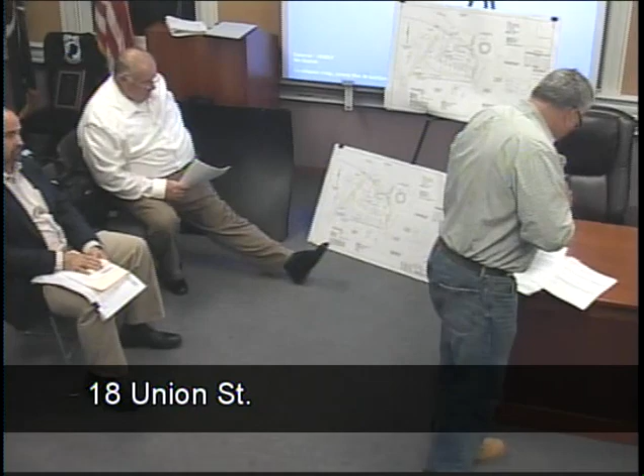For the record, my name's Thomas DePlacido with Four Oaks Corporation, and with me here tonight is Rick Goodrow from United Consultants and Jason Miller from Bowler Engineering to discuss landscape architecture. A follow-up on a couple of items for the board tonight: this was emailed over to the office today, but just a hard copy letter from Green International. This was for the internal turning radius of the ladder truck. It was discussed at the last meeting, but just so there's something in writing that verifies that. Sent us that.

Also, I don't know if the board has this or not, but we were able to get a confirmation from the building inspector on parking spaces that were required. This is an email to our architect verifying the square footage and what's required under zoning. Basically, there's 27 spaces required and 1 handicap space that he's asking for as well. So just his email confirming that. And you're providing how many? I believe there's 28, Rick, and 2 handicap.

There's one other important item I'd like to bring up: through a lot of the discussions and engineering, it came to our attention a couple of weeks ago that the adjacent property on Union Street, going down Union Street, it's very small right here, but we got a certified zoning map from the town clerk. What we thought was a residentially zoned property actually turns out to be commercial, even though there's a residential house on it. So this is up to the board, but we feel we may not need that waiver request now on certain landscape setbacks and buffers that we asked for under the site plan approval for I-4B1C. It will probably relieve us from going to the ZBA as well.

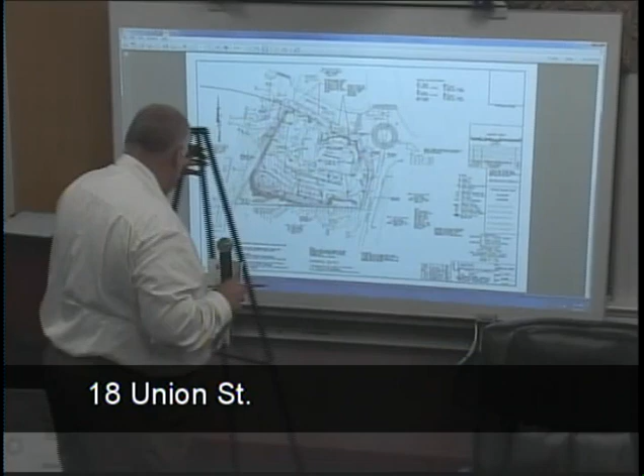Now that Betsy has the whiteboard working, I guess I can. Good job, Betsy. Yeah, all right, Betsy. She even has a zoning map up. We didn't need that either. Yeah, that's right. Didn't realize that.

Am I bold if I ask you to blow it up? Could you switch to the other? There you go. Nope, the plan you were just on, but the other page, I think there's 2 pages. Oh, yeah, yep. That one, Betsy. This one.

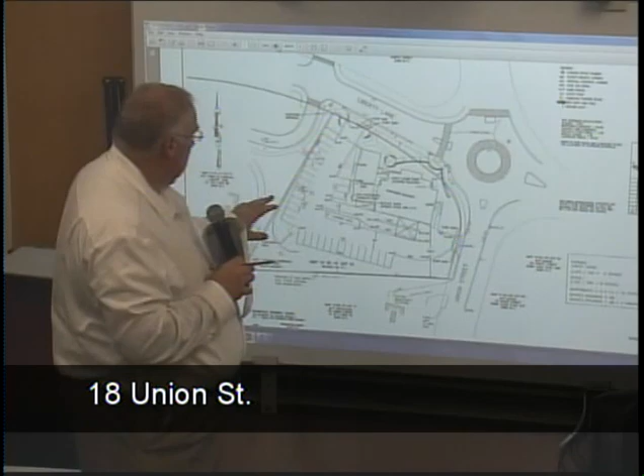So, the minor changes we've made were in this area here, where we previously had 2 handicap parking spaces in an offloading area. Those have been relocated over here. These are now 3 conventional parking spaces, and the reason for that was to utilize the offloading area to create a stairway connection to the town hall property from this site.

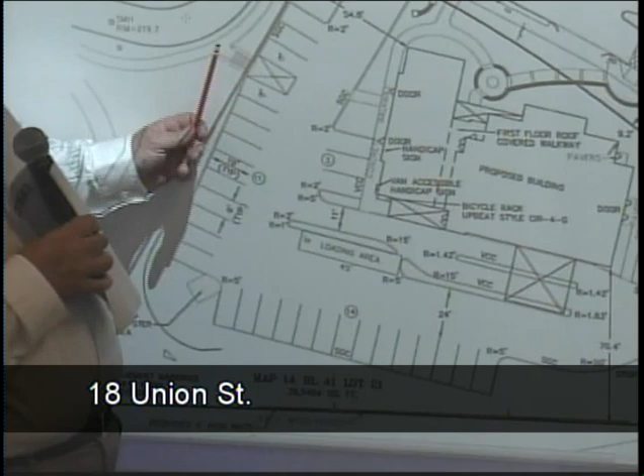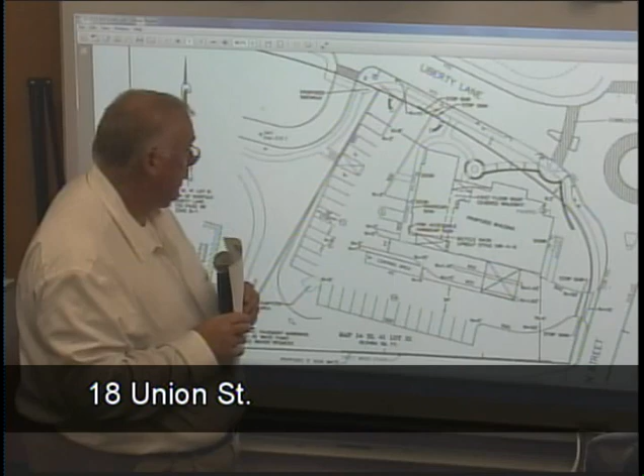Additionally, we've proposed a walkway to be constructed here, running up along the driveway for the town hall property. So those are the minor little changes that we've made. Jason's done some landscape concepts for that, and he'd like to show those to the board as well. Other than that, I think we could go through the review letter. Very good.

Phil, why don't you hit us with the major outstanding issues, and we can get Rick's response on that, okay? Okay. For the record, Phil Paradis with Beta Group. We've been asked to peer review this project. So we provided initial peer review. The applicant and the engineer have provided a response and updated plans. I think we're waiting for a couple more things, but we got a chance to look at it.

There's a few additional waivers as well as a few waivers that are being taken off because of the changes. The most notable is that the design has been changed to include an infiltration system to retain the stormwater on site, which will now meet the requirement of the bylaws. And he's also done a brief report on the impacts associated, so the W3 is not required anymore.

There are 3 new waiver requirements that they're asking for. Because the infiltration systems have to be fairly large, they are asking for a waiver to allow them to be located within 10 feet of the building slab and 10 feet of the property line, where 25 is required. They're also asking for a waiver for white paint as opposed to reflectorized paint for parking spaces. And then they're asking for a waiver for the face of a wall to be greater than 4 feet.

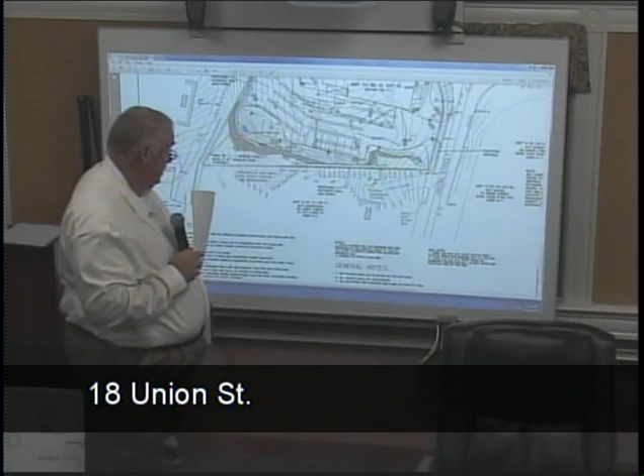Rick, what is the separation on those underground infiltration units? Can you change to the next plan, Betsy? I know we've allowed them on private property to be closer to the lot line on a number of occasions. Just want to see what the... This sheet on the other set, please. 8 sheet set from the first. There it is. Nope, that's not it. I'm sorry. So as Betsy's pulling it up, I can certainly show you where they are, but the structures are located below the elevation of the slab, the first floor, so they're underground below that.

And what's the separation from the high water mark on those units? More than 4 feet. It's more than 4 feet? Yeah. Okay. In that case, you don't have to bother. We had a couple, like over at Boyd's Crossing, they required some additional testing, because in these infiltration units, if there's a 2-foot separation or less, then they don't work. So as long as they've got that minimum separation, keeping it on his own property, not 20 feet inland, I don't think is a big concern, because they're gonna function properly. And they're gonna have their own responsibility to clean these things out, too.

Yeah, one of the other waivers we requested was for some hydrodynamic separators that are proposed, and a comment was made by Beta with respect to who would be responsible for that. Obviously, the property owner would be responsible, not the town. You would be. Right. I saw that, thanks. All right, thank you. All right, Phil, back to you.

So, yes, and then SP 19, we would expect a final wall design. That can be included as a condition, probably. Do you have the wall design already? Some of the design review board comments were that we use a Redi-Rock that looks like a larger block, but looks like natural stone when it's constructed. We do have that. I think what the consultant's talking about is a structural engineering design. When it's approved and we know we're all set with the walls, we would send that out to bid to a couple of different firms. Well, that's part of your building permit application anyway, to make sure those are structural. Correct. Yep, and we would supply that.

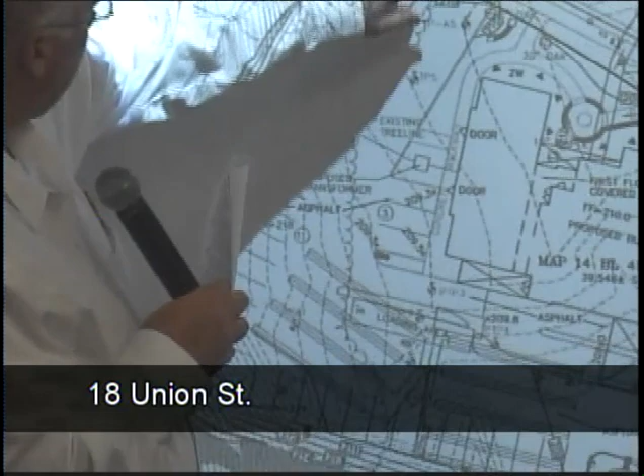The G1 on page 6, I think there's a confusion about the line of the sidewalk. The existing plans show a brick walkway crossing the town hall parking drive, and it looks like the walkway goes behind it. If I may, Betsy, could you change that over? So the issue with that is there's a transformer located here and a handhole located here. The handhole is flush. The handhole is flush, yeah. But we don't want to put the sidewalk through the handhole or around the handhole. So that's why we were proposing to relocate it to the back side of the handhole. It's very difficult to get a handhole relocated.

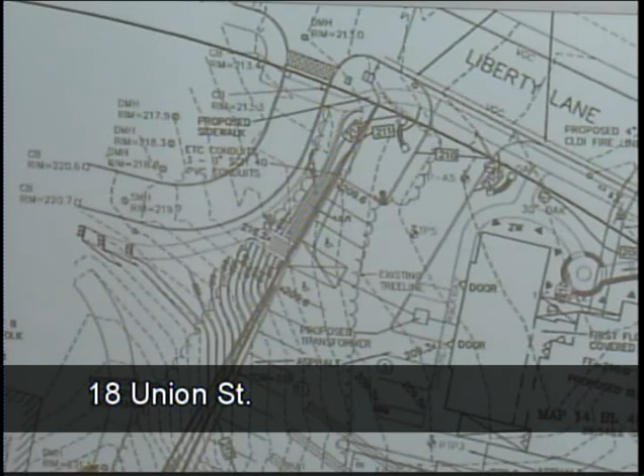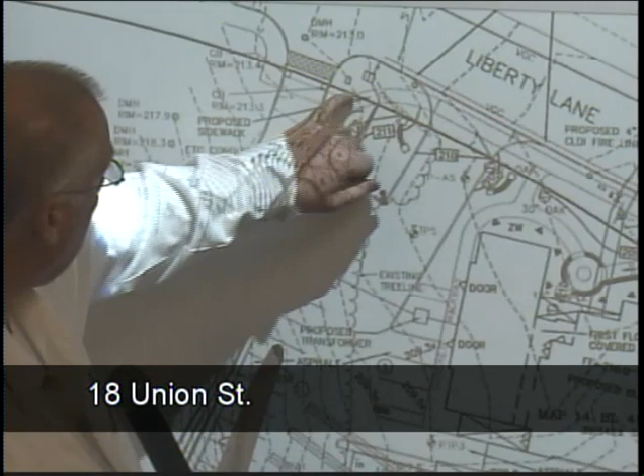So there's a brick crosswalk here existing? Existing at the town hall property. Then there's two catch basins here. So what we're proposing is to relocate the crosswalk due to this electrical infrastructure, the transformer and the handhole. So would you move the brick to the new crosswalk location? We would relocate the brick. If the handhole's flush and the utility company would allow us to put a flush sidewalk up against it, then we could go over it. But if not, then we would remove what's there and relocate it back a little bit. It's a good comment from Bader.

I really think it's going to be a field issue when we get an approval and get with the electric company, and then we could certainly update the board. You're probably not gonna be allowed to go over it, so you probably have to relocate that walk. Yeah, I think what's confusing about the plan is even if it's a field condition, it should be noted that the brick should go wherever the sidewalk is, because right now it's kind of like two separate entities. Do you have a note of that on your plan, Rick? Sure. Okay.

So, G3, obviously a lot of work has gone into the plan set, as if this particular entrance design is chosen. If we're combining it with the town hall, then I think there's going to be iteration of some changes, some engineering that has to be developed there.

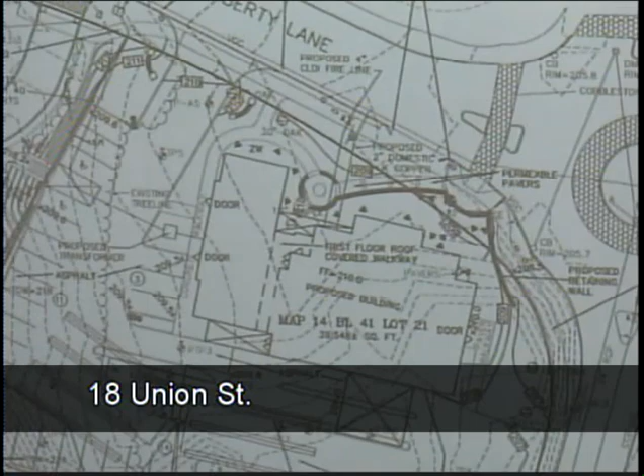Rick, can you just point to where the right-of-way line would be on the drawing? Sure, this line here represents the right-of-way. That's what I thought. Okay. This is the sidewalk that's being proposed, this is the sidewalk that exists currently. So we're picking up at this point, running the sidewalk down, and then this is the decorative wall here. And then there's a seating area built in behind it, which you'll see on the landscape plan that Jason can show you.

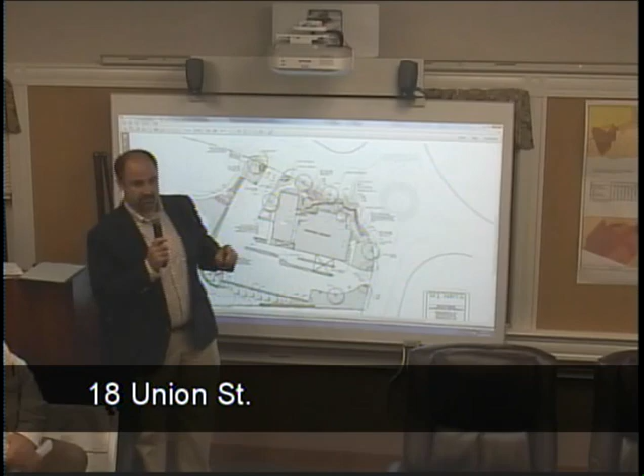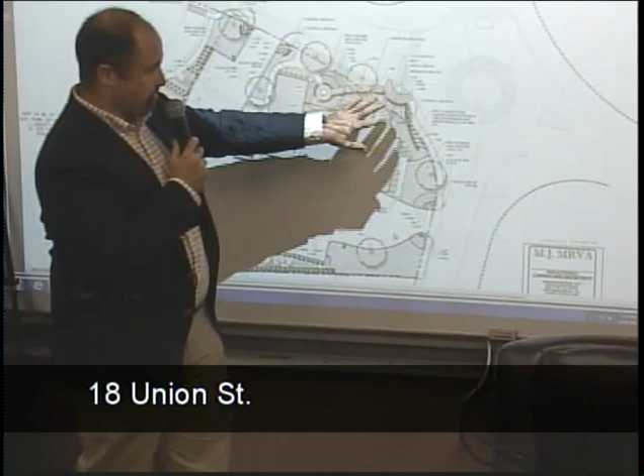So when we were looking at this area, we saw this as the bookend for the streetscape that comes down Liberty Lane. And it also helps connect across the street to the common area. And so the materials of the walls and of the paving themselves mimic what was happening across the street. So it ties the whole streetscape together. So you create this nice urban design feature for pedestrian circulation as you move through here.

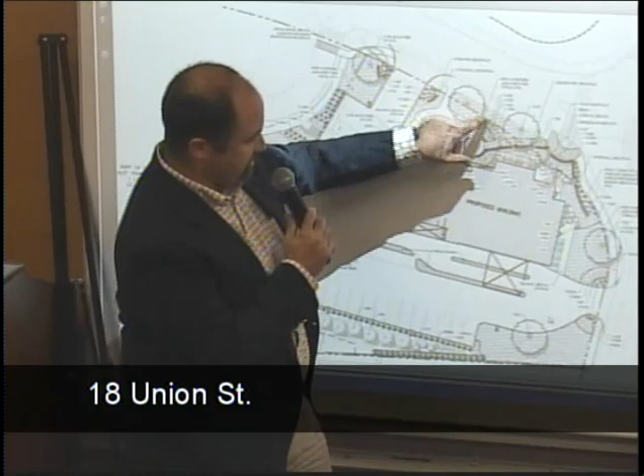And then this is where the right-of-way line is here, so you can see that this is where the paved area is with the walls. By situating it this way, you have a nice landscape transition from the back of these walls up to the proposed building. Where's this actual sidewalk going to be? So this sidewalk's going to be right here.

So is it going to continue on? Yeah, continue that way. So it goes through the seating area, John. Okay, that's what I was asking. Yeah. Very similar to what it does existing across. This plaza is a little bit bigger than this one is here, but I think that one has the more importance from the town perspective. Okay.

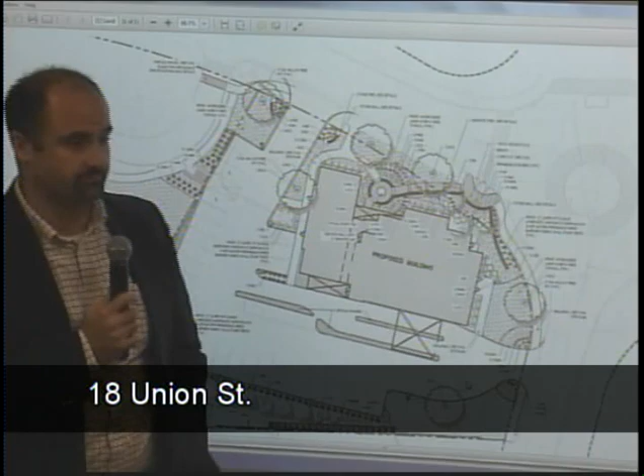Anything else? Yeah? I think part of it's going to be within the town right-of-way. Right. So I think the ownership and maintenance of it is going to be maybe a condition or something. Okay. Did you get that, Gino? Yes.

Then there are probably some housekeeping things related to stormwater management that are not too big. We would, however, call your attention to SW1H. The infiltration rate used in the model is reflective of a high A soil. The NRCS soils map indicates that the soils are, I think, a Canton loamy sand or fine loamy sand, I forget exactly, which are rated as a B.

So we would request that the applicant provide some infiltration tests to confirm that they're using a higher rate for this area. I don't discount that they're likely to get that, but I think it's a policy that we should. Have you done any testing out in that area? We've done soil testing for the septic system.

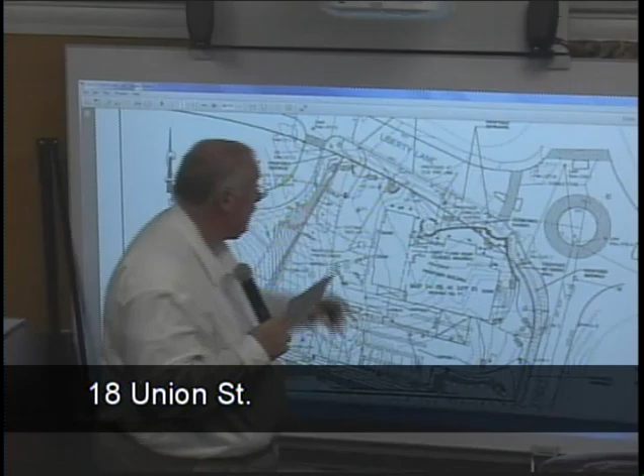Now, the NRCS mapping is classifying this as a Canton soil, which is a hydrologic soil group B, which would not give you a medium sand, typically. But the field conditions, the 4 test pits that we excavated, indicated medium sands. Where were your test pits? There's a test pit here, here, here, and I believe over here, right here. I believe those are the 4 that we dug. And then we also looked at, it's got to be half a dozen test pits that were done by Coler and Colantonio, and those soil logs were also provided.

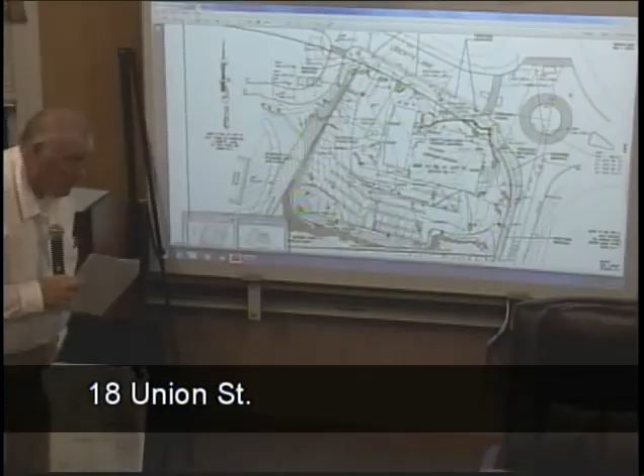So your data is differing than the, what was it, geological data? I don't know where that other source was. Soil Conservation Survey by Norfolk County. Do they differ? Yours is more favorable. Well, the county just maps them based on geology. He's saying that he actually tested it. Now, when you tested all around the site, did all of the soils come out the same? Yes. So the whole site, no matter whether you're the back or the front, all of them come out the same? They were all sands. I believe they were fine sands to medium sands, but they were all sands.

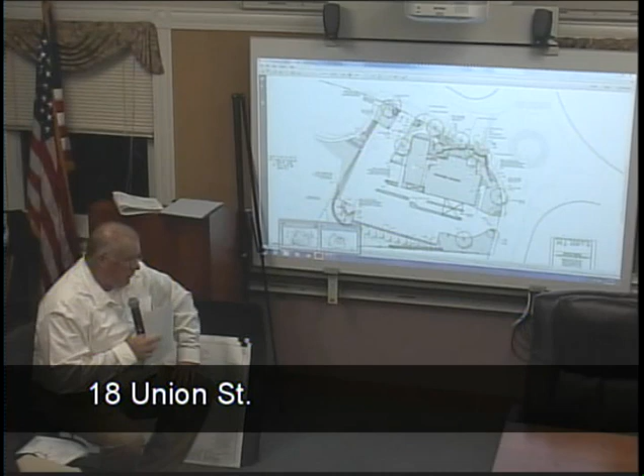Rick, where are the infiltration points relative to the places you tested? There's actually one located over here and one located over here. So, okay, so they're a few feet away from where you tested. But there are soil logs that we had from the other firm that were in those areas, that indicated that it was the same type of soil that you were seeing when you dug your pits, right? Yes, correct. And actually, when this went through permitting previously, Coler and Colantonio did the engineering design at that time, and their drainage design was based on the same Rawls rate that we use, 8.27 inches per hour.

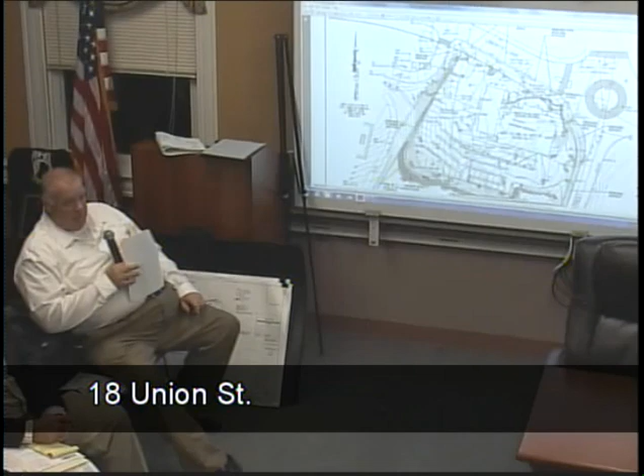So do you feel that the number and location of testing sites satisfies best engineering practices from what you're advising? So I think it's DEP's policy to require that you use the Rawls rates for the NRCS soils, unless, if you want to use something different, you provide on-site testing.

So I guess the question is, that requires- But didn't he do that? Didn't he provide on-site testing? That was my question. He did perc tests, which are tests for the septic, but not... But the question at hand is the type of soil, correct? I don't disagree that he's gonna get a high infiltration rate. I think it should be a practice that whenever it deviates, you provide those tests, you know.

I think he may actually get a higher rate than the 8.27. I agree. I mean, based on what we've seen, I'd expect these soils to be in the 40 or 50 inch per hour range as opposed to the 8.27 we're using. You don't know till you test it. What's the downside of testing? Just more cost, obviously. Otherwise, yeah, we'd have to go out and test. Or time? Time and cost.

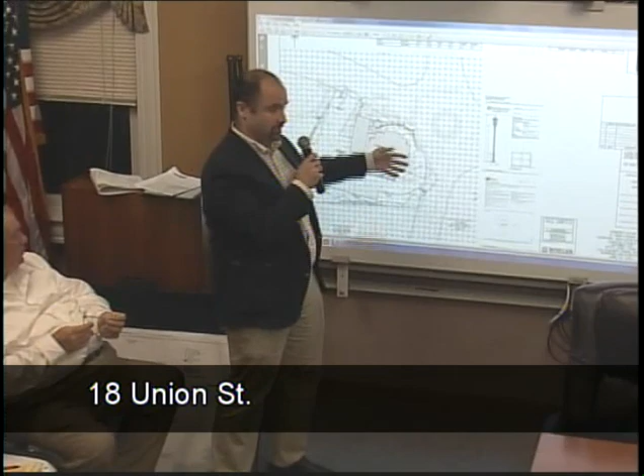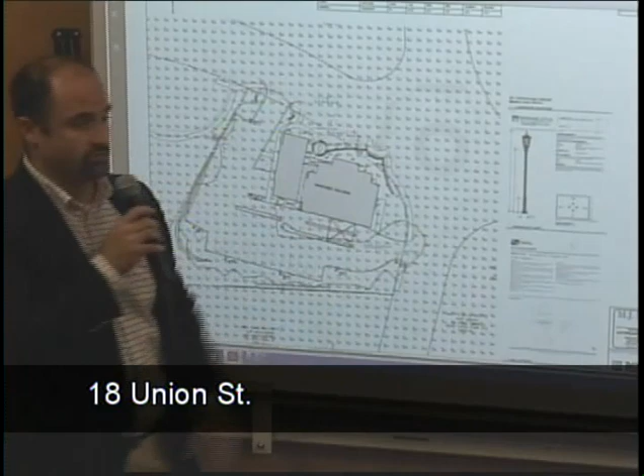Okay. So you've just made some modifications to that based on their comments? Yeah. And so if that's the case, I think the lighting plan also, if it's been changed, should go back to design review to follow through on their initial comments. Right. So this shows you the locations of the overhead lights in the parking lot itself. And then in the front there are uplights that would be either in the trees themselves or cast up on the building. This is the light pole we'd be using in the parking lot, which is the same light fixture you see along the street. So it ties in the lighting elements from Liberty Lane into the site itself.

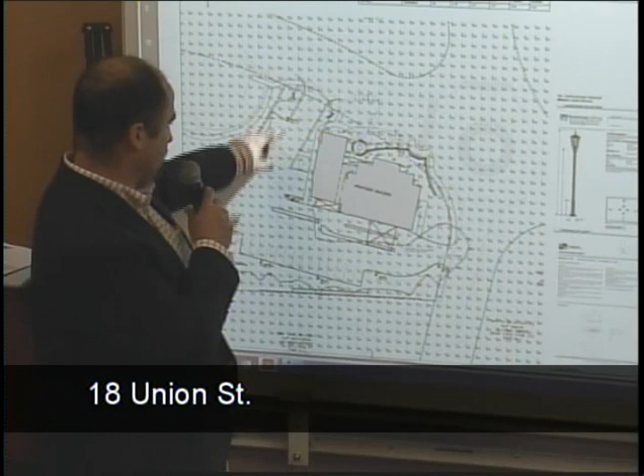So what were the modifications design review had you adjust? Some of it was locations of light poles, to try to get more light in this area, because originally we had this light pole a little closer to the wall, and then we moved it here to add more light to the parking. Betsy, do you have a copy of the design review's report to us on the lighting and the landscaping, their initial plan? Sure. All right, so as long as we have that for the file, we have a record. If nobody has objections, we could have this plan and the landscape plan sent over to design review to follow up on their initial comments, to make sure they followed through as they were supposed to.

Sure. Were any changes made to the lighting to accommodate this pedestrian walkway change that you guys put in? There was no lighting for this right here. Is there any additional lighting? There was no additional lighting made for that. We could leave it up to the design review board to make their assessments and re-review, especially where they've done the first report. Now they're getting their second report back with their comments. I think it would be out of place to look at it ourselves first, so they should give us a report back and make sure it conforms.

We also made changes to the design review's landscape plan. Do you remember that? Did we make some changes to their comments also? There was an island or something, planted in the middle, and I think we pulled it up to the edge or something like that. All right.

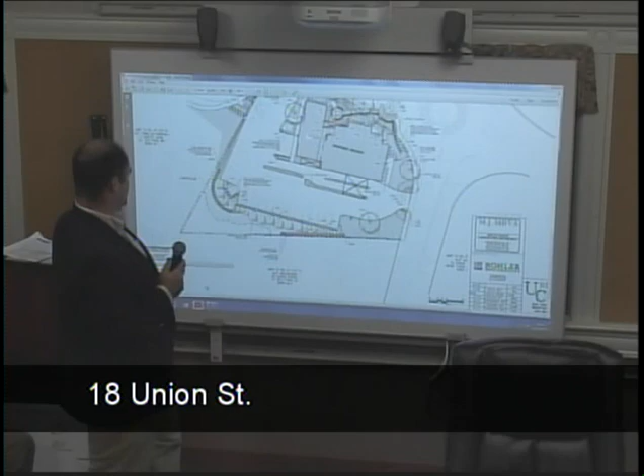Mr. Chairman, I think it might be worthwhile if Jason from Bohler just highlights some of the revisions based on comments from this board and the design review board, because we're pretty excited about this new landscape plan. We reduced the height of walls, and I think the whole pedestrian pathway is very friendly. Sure, go ahead. One or two, Jason? One. Yeah, it's perfect.

Before we go here, I'm so sorry. Where are we at with this alternate entrance location? I'm sorry if I missed that last time. What's the status of whether we're going one way or the other? Isn't that on the warrant for the fall town meeting? Yes, it is. Why is it a warrant issue? Why is it not coming up here for us to recommend? Well, if they use the alternative entrance, it has to be approved by town meeting. That's the law.

What I had talked about is, when we close this out, I would like to vote on approving both entrances and give a recommendation on which one we'd prefer. So if they get it voted at town meeting and we prefer the combo entrance, then that's the one they should be required to use. If they don't get town meeting approval, then we could approve the other one. And it is on the warrant. So the reason I ask is because it greatly influences your landscape plan, right? How you treat that corner and the entrance is largely driven by where the entrance is. So that's why I interrupted.

I think if we approve this plan and recommend the alternative entrance, we should probably have a stipulation that they come back with an adjusted landscape plan. We can actually go over that tonight, if you'd like. We have an updated landscape plan for both options. Perfect. I was almost wondering, shouldn't we develop the one that you recommend, emphasize that, and then have this as a backup if it doesn't pass? Yeah, we'll need both because the town meeting could reject the proposal. I know.

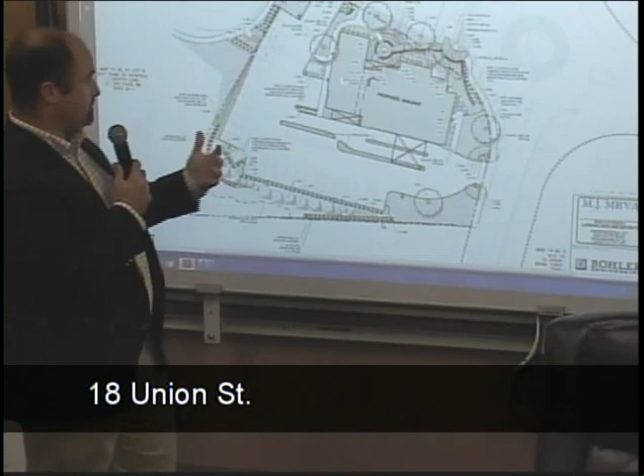Absolutely. So why don't we start here, and I'll run through a couple of landscape changes. I'll summarize from the DRB and where we are now, mainly in the rear. And then we'll talk about the alternate layout after that. Great. So let's start in the rear. Originally with our wall design, when we went to DRB, they commented on how to soften up the wall from the view from Liberty Lane.

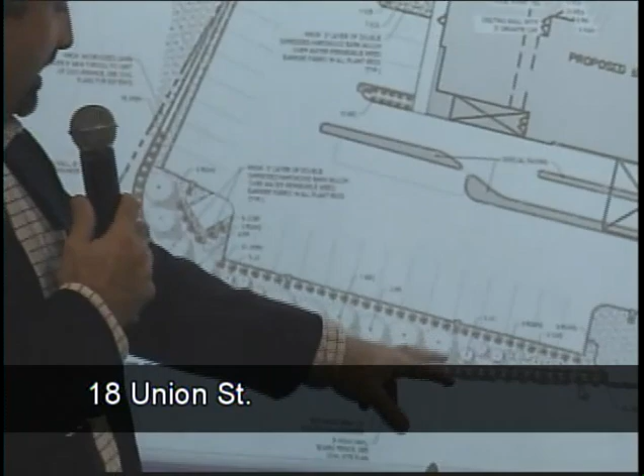So we went back and looked at the wall design and how we could break them up and then add this evergreen planting screen that's along this bottom level. So when you're looking down Liberty Lane, you'll actually see these evergreens themselves that help soften this wall along both of the retaining walls here.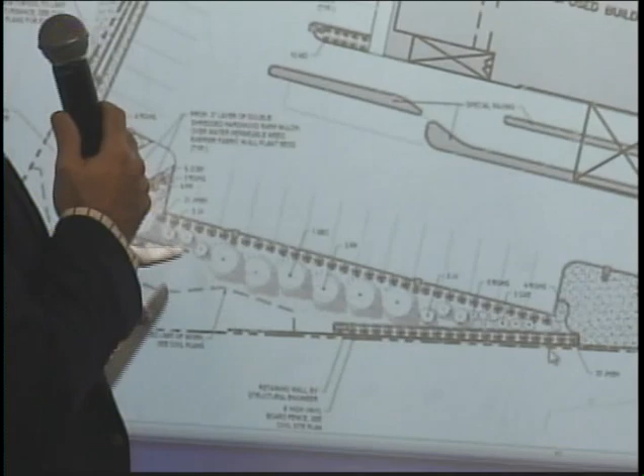And then on the retaining wall that's on the lower property line here, we actually planted evergreens behind that with the same concept for the other retaining walls, doing the same thing along this edge, which would just be junipers. It's a low maintenance plant and it will help soften up the walls in that area. So those were the rear changes for the landscape, which really helped soften the wall in this area.

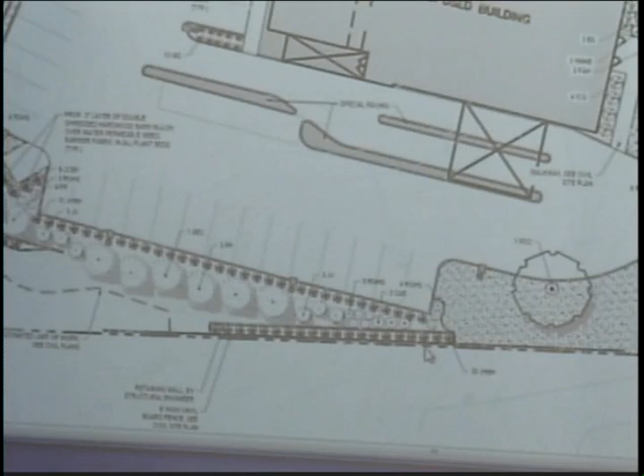Is it a two-tiered retaining wall? Yeah. Here. This is where you have the one wall here, then you actually have the fence along here. Originally it was a two-tiered wall, but it's no longer a two-tiered. Just to clarify, it's just one wall with the fence, and then this is where we're able to do some evergreen planting, junipers. If it's gone back to a one-wall design, how high is the wall?

It's in this plan that he handed us, I don't know. Betsy, can you go to sheet 4 of the site plan? The original site plan, right?

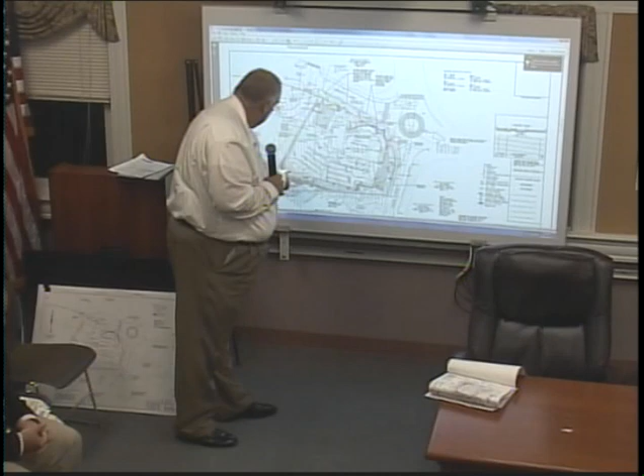What we've done in front of the wall, from the parking lot leading up to the wall, is we've done some grading to soften the height of that wall at a 1-to-1 site grading, fairly steep. And we provided a planting area in front of that, as Jason had mentioned. So you're gonna see the evergreen shrubs. So right in here, behind the dumpster pad location, we were able to do some grading in front of the wall and soften that to about 8 or 10 feet.

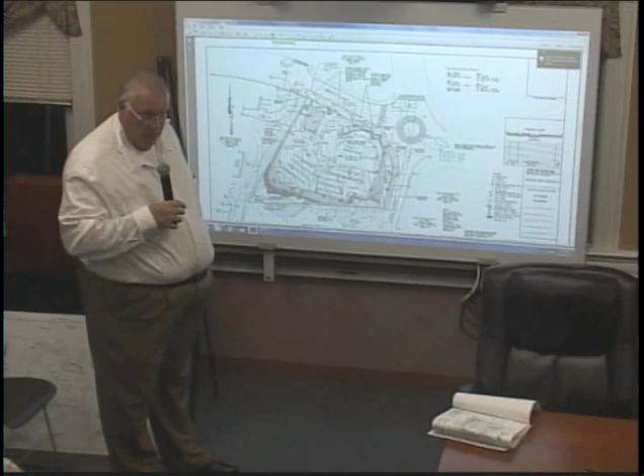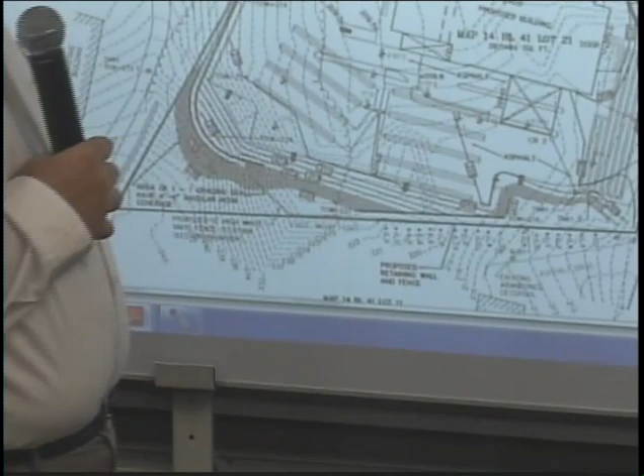So now you're gonna have the evergreen planting that Jason's showing up here, that's gonna be blocking a portion of the wall. And then this smaller evergreen planting up top that kind of blocks the fence that's on top of the wall for safety reasons. And the wall itself is how high? 8 or 10 feet? 8 to 10 feet. It might actually get up to 12 in a couple areas. I mean, it varies. Okay.

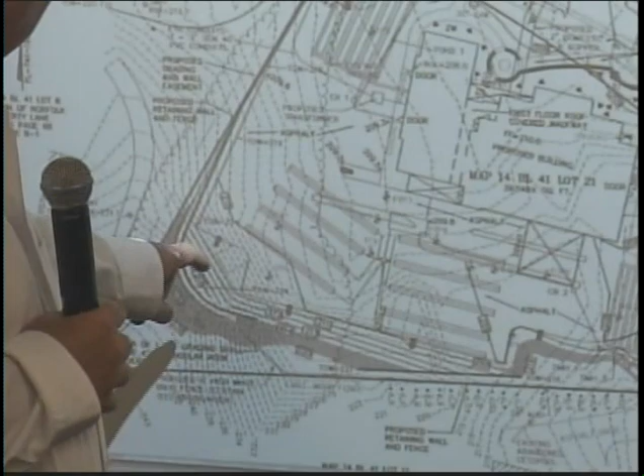8 to 10 above, so you're sloping up. A sloped planting area, and you're 8 to 10 feet above the top of that slope or above the parking lot? The sloping's probably 6 feet from the back of the dumpster pad location to the bottom of the wall, and then it's 8 feet from that point. Okay. So 14 feet above. And that slope on the planted area, what is the grade? 1 to 1 is what we were looking at.

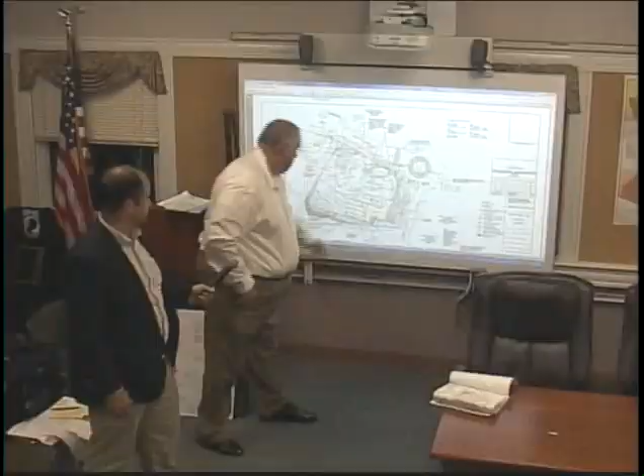And this is the wall that's faced with the stone that Tom was talking about? Just to minimize the wall. Makes sense. 1 to 1, okay. Yeah, in combination, rather than flat. Now, how about down the remaining wall out to Union Street? This wall here, yeah, that's much lower. You're gonna ask me, now I gotta read it, because I can't read it on there. So the highest part of the wall is around that corner? Yeah, we did a lot of grading revisions and softened it all with landscaping as we went through it.

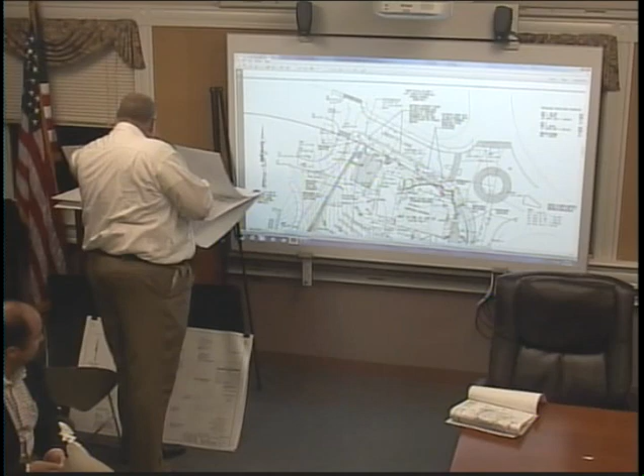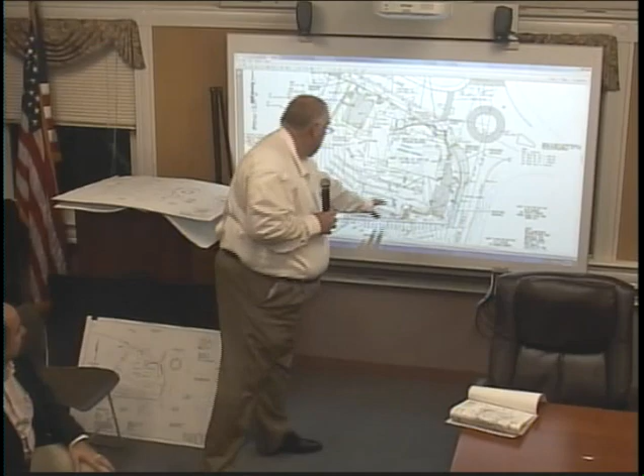So that wall, I mean, it varies. You've got some steep grading in this area here tying in, but that's like 6 to 7 feet or so in height in this area here where it's at its highest. The grade's dropping off, the wall's following it, and our grade's coming down along with it. Is the parking lot itself sloped up towards the wall? No, this parking lot's relatively flat with some undulations to direct the stormwater flows. So those evergreens also follow along that sloped planted area? Yeah, we wanted to screen the walls, is really what the intent was.

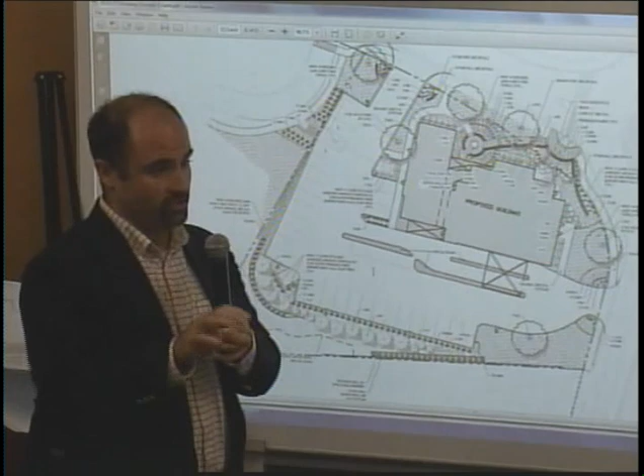So this is that area we were just talking about. If you can envision it, if this wall is 8 feet tall, these evergreens are 6 to 8 feet tall. So it's really just seeing the tops of that. But what helps visually too is that you have evergreens on the top of that wall too. So you'll see the top of the evergreens, a little bit of the wall, and then evergreens above that as well.

Then the fence behind it. So, and then the plan indicates that you're gonna have stone slope behind that. Right. And that's what these evergreens help screen, is that stone riprap slope that goes up. So where we're able to plant is where the grades are a little bit further apart. They're not at the one-to-one slope.

What's behind your evergreen? Is it a deciduous? Where you have the larger diameter? These ones? Yeah. These are the bigger evergreens, so they're like spruce trees. Oh, so they're also evergreens. Right. And the nice thing about the spruce trees, instead of just going straight up, they'll get wider too and really fill that in to screen.

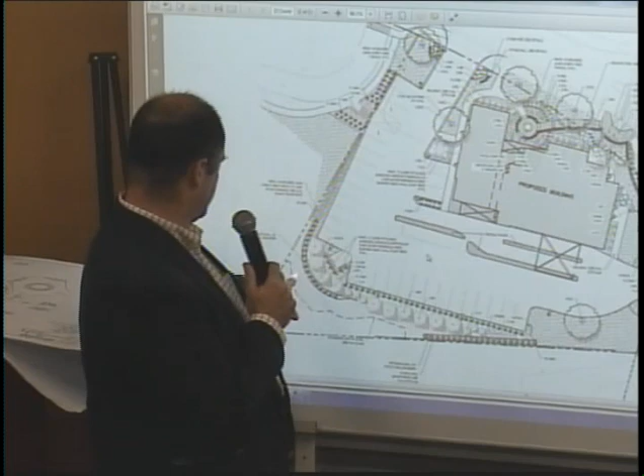What variety is the smaller evergreen that you have along the line? These ones are cedars. No, the entire line. This one here? Nope. That marches all along the parking lot? Yeah, what's that? Those are grasses. They're going to be out in front. Oh, okay, those are low. Yep.

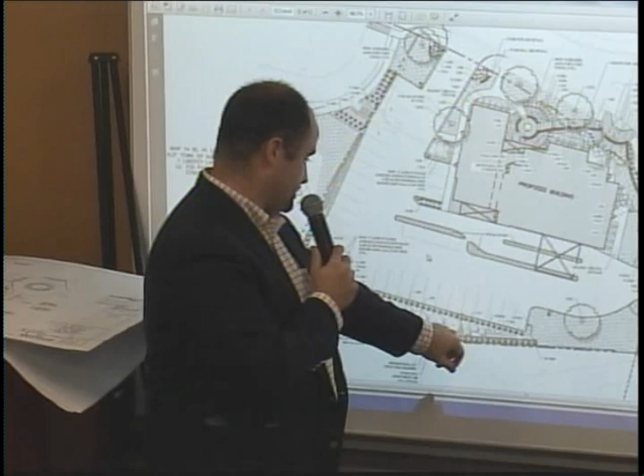And the wall that's right up against the property line, is that really the fence, or is that the wall too? So this is the fence line here, right up against the property line. Then you have a row of juniper trees. And then in front of that is where you have the retaining wall. So there's a separation from the property line. Fair enough. Okay, so if you're in the parking lot, you're looking at two walls in that section, is that correct? Here, you're looking at one wall, because the wall is here.

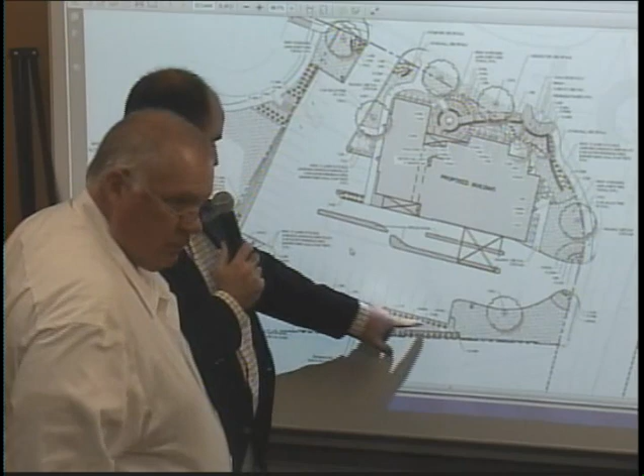I'm missing it. That long row with grasses, is that what you said? That's out in front, not a wall at all? Nope, those are plantings. You're at parking lot grade there. All right, I understand. Thank you. So when you look directly up that driveway, you're gonna see the top of the stone slope is at 239. The parking lot grade is at 210, so you got like 29 feet.

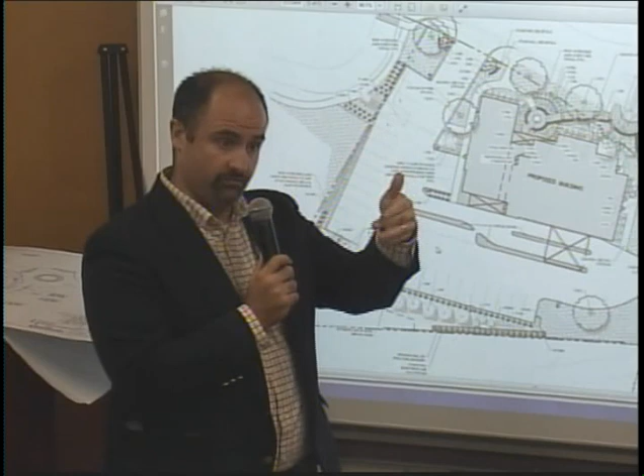And you're gonna break up with the evergreens, is that it? Two levels? Right. So you have the big evergreens that are here, then you're gonna have the wall, then you're gonna have evergreens behind the wall, and then behind that evergreen is the fence. How high is the fence? 6 feet.

So I like it all except that in the forefront is a dumpster. That kind of bothers me. And I'd really love to see if there's an opportunity, I mean, that corner's sort of becoming a focal point in a nice way, a soft way. But I almost wonder if you could put it on the opposite side. You'd have to relook at parking and all that other stuff. The dumpster would be fenced, correct? Yeah, but I'm thinking of sight lines, your eyes carrying up to it and being brought up by a dumpster enclosure. It's just not doing it for me.

I think they got it there because it's the deepest part of the lot. Yeah, I didn't know if you could get it on the exactly opposite symmetrical corner. You see what I'm saying? What do you think? I don't know. Worth exploring. Because then, you're coming in off the street, it is this sort of anchor in the background. You're really doing all this nice stuff to soften it, and it just feels like a lost opportunity.

Yeah, I understand you. I think one of the tough things is getting the access to there, and it's the parking. Yeah, I don't know if it's possible or not. It may be worth just exploring to see if it's possible. May not be. Could you take a look at the alternative plan now? Yes, can we touch on this? This is the other area I wanted to talk about with the landscape before we do that.

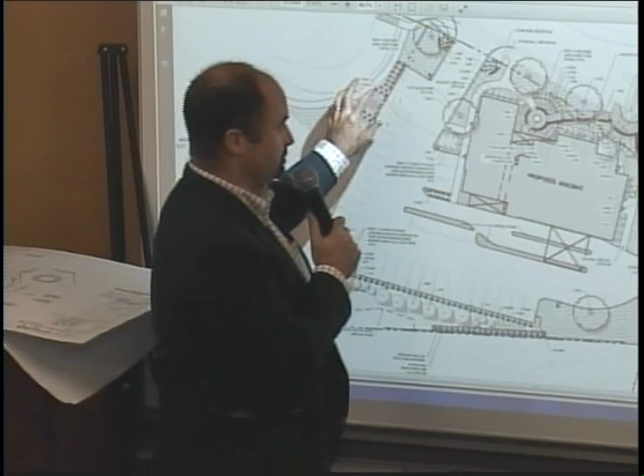Right, so we have that nice new walkway with the stair connection. The materials of the stairs also talk to the materials we're using here, but also the materials at the plaza, with the stone walls and then the nice staircase going up. And in this area, we're planting around the stairs with juniper, and we're also adding daylilies along the edge of the wall, so we have some nice seasonal color as people move.

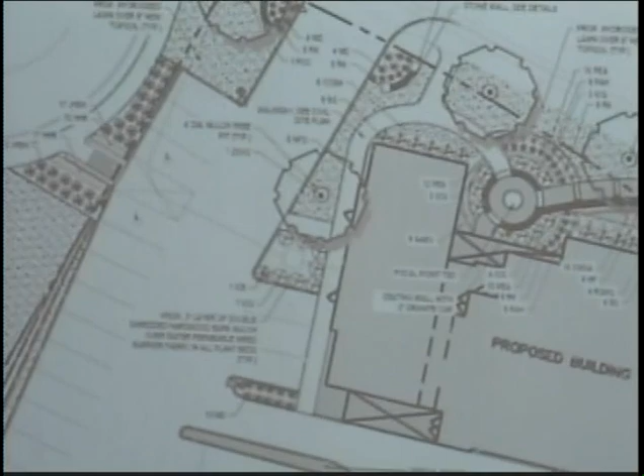And what is really nice about this too is it really connects the pedestrians from Town Hall to the site and into the center. Similar materials, you say, to what's used, is that granite? Yep, granite. Granite and then stone walls. We can go to the alternate plan, please. Let me send it to you, concept two. Perfect.

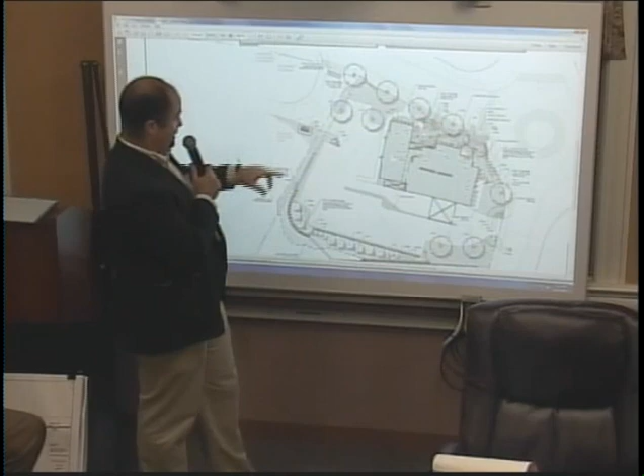Okay, so with the landscape, everything kind of stays the same around the site. The only place it really changes is here, where the entrance would change. In this area, this is where you would have the directory sign that would have the landscape. So visually you would see some nice landscape here, but also down the roadway you would also see landscape at the sign with some pocket plantings as well.

And then you would have two more shade trees in here. And we were able to add another tree along the streetscape here than what we were able to have on the previous version. To the point of the dumpster, is it still there in the corner? It would still be in that corner, yes. Doesn't look like it, but. Yeah, so you wouldn't see that landscape there. It'd be just like the one before.

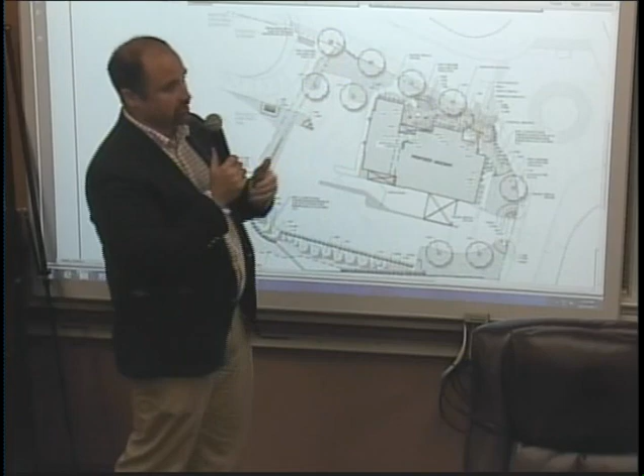Any questions, anybody else? And that additional shade tree you got on the corner is okay, because that's the exit for people coming out of Town Hall, right? From a visual. Right, it might have to slide back a little bit, depending on where the walkway settles too. Speaking of walkways, presumably the entrance has a sidewalk from the town hall down into the property? You see where the sign that you pointed to was? Somewhere along there, is there a walkway or a sidewalk? It wasn't proposed on this one.

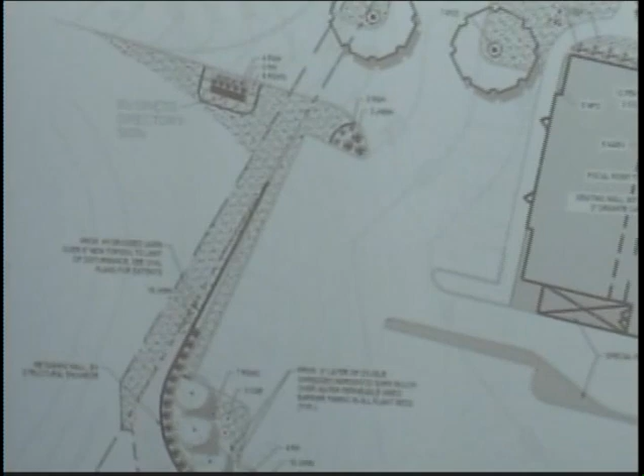So on the previous one, this is where that walk was. Yes, I understand, but now that we're proposing on this one a joint entrance from Liberty Lane, there's no footpath from the town hall into this property. Let's say you finished your business at Town Hall and you walk along the sidewalk and are coming down to this, it would be nice to have that walk continue. You'd actually continue out into the street.

If we did do that, we'd have to remove quite a bit of the landscaping in that area where the business directory sign is. We'd actually have the sidewalk come through here and down to that area. And where that landscaping is in that island, we'd have to try to make something happen in there as well.

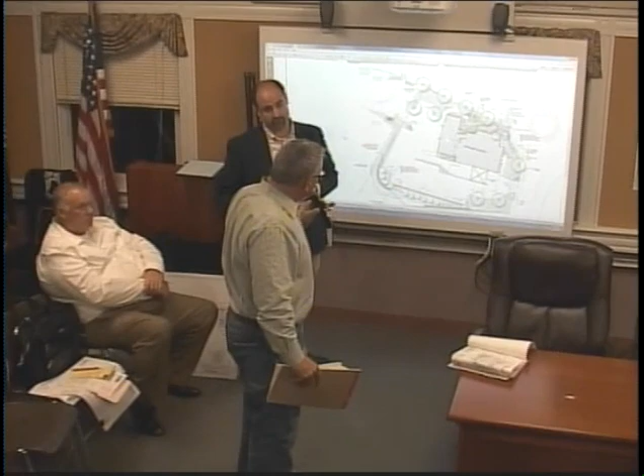Well, I just think that if someone does come out of either building and head to the other building, Town Hall to here or the other way around, they're not gonna go all the way down to the street and walk around, they're gonna walk right down the road. Right. Especially with that nice cut through the building you did to encourage that kind of circulation. We sort of lose that a little bit with the two lane. Can you put some stepping stones in there or something? Yeah, what about that stairway from the other design? Could that still be put in there?

It gets a bit more steep the more we come this way. Actually, we just run out of room. We can look at it and see what we can do, but if we put the sidewalk in, it has to be flatter. The more you come to the back, the more steep the property is. Yeah, sure. As evidenced by the discussion we had about the corner there. Has the grading been worked out for making that connection? That looks very challenging in terms of grading. Yes, that's included in the plan set, the last two sheets.

All right, I want to start. Any other questions, Walter? No. Okay.

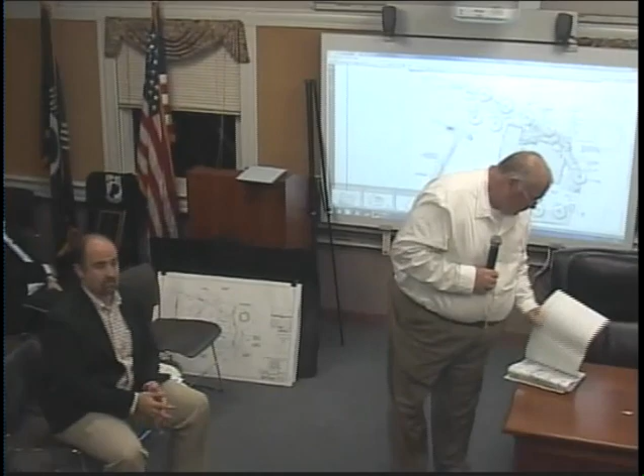So right now we have the lighting change review for design review, and we have the landscape review for design review. Folks feel we could close this meeting contingent on getting those approved by the design review committee? Can we close it contingent on also making suggestions for feedback they have? I mean, it's one thing for us to receive, it's another thing for us to get them to incorporate it.

I think, yes, it will. The only place that will affect is here. Because right now, the light fixture that we have is right around this location. So it's a matter of moving the light, or adding another one.

I think we'd like the contingency along with getting the design review to look at the updated changes, that if town meeting decides to allow the alternative entrance, we get an updated plan with the landscaping and any changes made by using that area. Because like I said, when you get out to the site, you may find things are different.

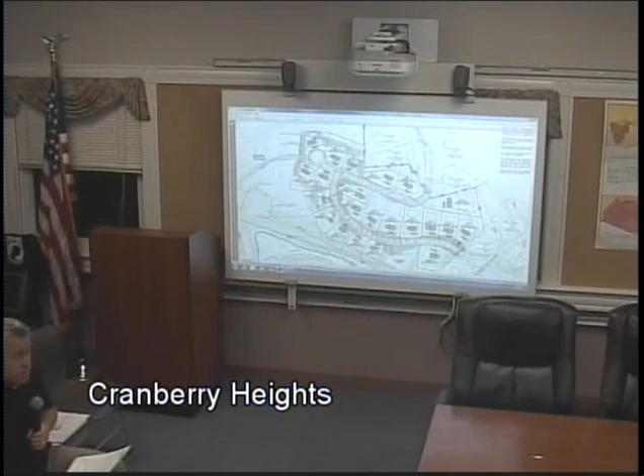We are in receipt of a review letter from Beta Group Consulting. We didn't prepare any responses to this letter, didn't feel any were necessary. But I think it would be best, Mr. Chairman, to go through some of these comments, see if the board feels anything specifically needs to be addressed, or if any questions need to be answered. And then following that, I'd like to hear some additional comments from the board and see where we'd like to go from here.

Before we go over with the peer review consultant, Gino, one of the comments from planner, can you call up the yield plan? So the yield plan, for folks that don't know, is a plan that shows what they could build by right. And once that plan is accepted, then they're allowed to do an open space plan and change frontages and setbacks and add 10% more lots to their plan.

Now, the dead-end cul-de-sac there with 2 lots with no turnaround, upper left. That's supposed to have a turnaround to be built by right, not a dead end. It could be extended to that abutting property, which is held in common ownership with the current landowner of this property. Well, that's really what you got to show. It says on the deeds, Town of Wrentham. Is that old? Are the notations on the assessor's map old, because that says Town of Wrentham for ownership? It is, it's in the town of Wrentham. It's Eagle Brook Estates Realty Trust, but it's in the town of Wrentham.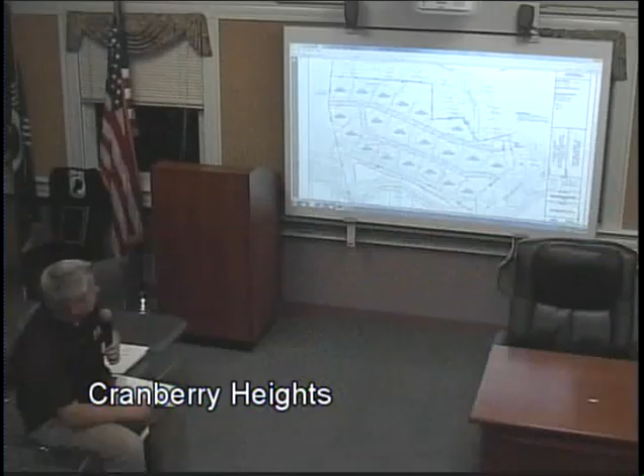Potentially, right. So, is there an intent on the part of the developer to continue the development in the next town? There's no intent, because the open space plan shows all of this area to the south as part of the open space. Gino says that's Wrentham, and that can't be included in this plan. I understand, I'm just trying to figure out if this is only half of what's going on, and there's a similar set of drawings in the town of Wrentham that shows the marrying of the two. And he says no. Right. So see the circle on the end here is the space for a turnaround meeting requirements. But that's not relevant, because you have a temporary acceptance of a temporary turnaround on a town right of way.

So basically, unless there's an answer, you're gonna have to adjust your yield plan and adjust the open space plan accordingly, if it results in the need for that. Yeah, exactly. Maybe you could reconfigure things so you have that turnaround and still get the same yield. Sure. Okay. All right, you're all set as far as your questions then, right, Gino? Anything else that's not answered before we go on?

The other comment I had was on the cut and the 100,000 cubic yards being removed on the open space plan. The criterion for an open space concept plan says one of the goals is to reduce cuts and fills. I didn't see a calculation for the conventional plan, if more or less cut and fill would be required compared to the open space plan. Well, you're correct. We did not provide that calculation because I think it speaks for itself. And if you'd like to see it, we can do that.

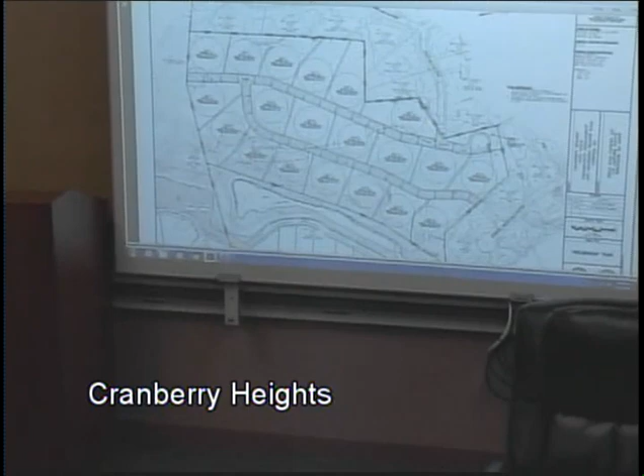And what I'll also say in response is that since our last meeting and since we submitted these plans, we've been continuing to work on some design components, specifically some grading of some of the lots, especially along this southeastern edge where there'll be a lot of fill. And we've got the net cut less than 50,000. Oh, big change. So we've made some adjustments as we're working our way towards a definitive submission, hopefully. At the client's request, we've started to look at those things.

The length of this road alone, which ties into the same two locations plus the added length, would certainly yield more than 50,000. Understand that, as you know, and I think in the beta report, we have some calculations on the cuts required for some of the lots, which isn't part of this cut and fill. Your cut and fill is the roadways. The cut and fills on a number of those lots going down are gonna be 30-foot cliffs off the back.

And what the planning board is gonna have to decide on their own, with my one vote, is the theory of an open space is to minimize the change in the topography and keep things as natural as possible so that we're benefiting from the natural contours of the land. Which is why I asked for the cuts and fill analysis and tried to have you at the last meeting go back and cut that back. And I understand this is a very difficult site to work with.

And we stand with these cuts, and we had mentioned that the 100,000 cubic yards is in the range of, to use the terms from another project, 4,000 tractor-trailer loads or 8,000 truck trips. If I got that right, Mr. Judici. So anyways, unfortunately, we have to consider when we grant or not grant the open space part of this the activity going on across the street. So in theory, if this is going to be a small resemblance of what it is right now, then the board has to decide whether the open space plan is the best way to move forward.

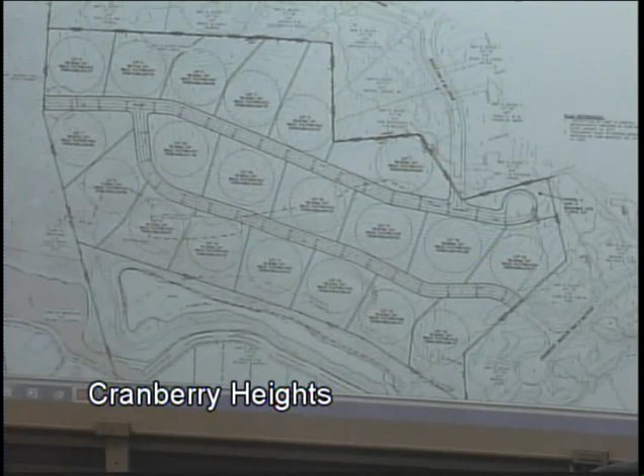Right, and one more thing, Mr. Chairman. Sure. I do understand that the cuts and fills from the road are a direct result of the subdivision of land, but when it comes to talking about truck trips for imports and exports of soil, if we can demonstrate by plan preparation that lot development is going to reduce the amount of export from the property, I think that's valuable information for this board to make a decision. Well, you can cut the truck trips in half or less.

Maybe Gino's comment then of providing the truckloads coming out of this subdivision with the yield plan as compared to the open space plan. Why don't we use that as the first barometer to measure this, to see if it's helpful? Sure. And then when we go to our engineer, we're going to talk about the lot configurations and the slopes that are going to be kind of steep there. We can go into exporting of material as a second phase, okay? Sure. Phil, with that, could you go over each of your items? And after Phil gives us each comment, I'm going to see if there's any questions before we move on to the next one, so they remain fresh, okay?

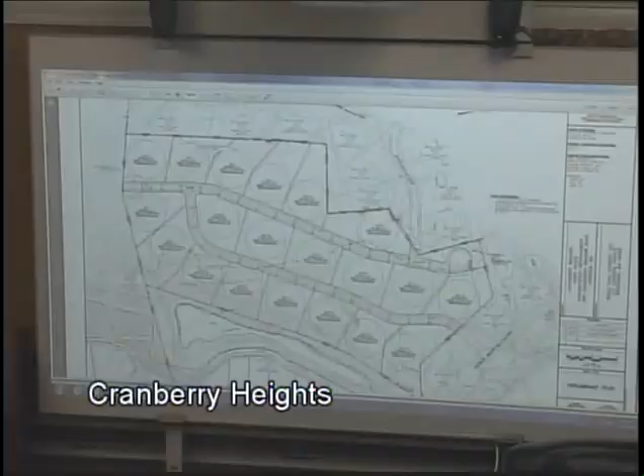So, relative to the yield plan, we noticed that a significant portion of the property is within a Natural Heritage and Endangered Species Program mapped area, and I didn't know if there's been any discussion with them in terms of whether this would constitute a take, either the yield plan or the open space plan. We have met with them. They have informed us that this would not be determined to be a take if we could provide them with 50% of the acreage as open space.

And provide them or the town? Well, either provide, yeah. Okay. If we could preserve. Okay, does it matter where that 50% is? It just needs to be contiguous. And obviously, they would prefer that it be as much as in their mapped area as possible.

Yeah. So on this plan, you can see this dashed line; it actually kind of gets buried by the property line, but it kind of runs along the property line. So everything in this area is mapped endangered species. It's a salamander, and instinctively you would think it would come from the wetland resource area down here. It actually doesn't. It actually comes from two vernal pools within the existing neighborhood.

Okay. So that's why the mapped area is more on this westerly side of the property, because the source of the salamander, as I said, is off here to the west within the neighborhood. They did not map those existing properties because they're already developed. So that's why in our open space design, we preserved most of that area. Okay.

Did you say 15 or 50? 50. 50%. Yeah, 50. Would that impact, obviously, the layout of the yield plan? Correct. That's one of the reasons why I feel like the open space plan is a better plan. No, but what he's saying is, again, do you need a modification of your yield plan based on that criteria?

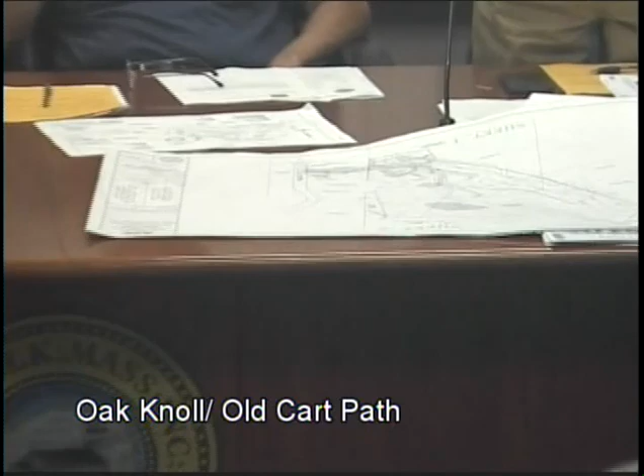Sean, correct me if I'm wrong, but once we release the lots, isn't that our last bit of leverage to ensure that these kind of things get done? Do we have anything else that we can hold at that point? Well, what I was going to suggest is that we release the lots contingent on these things being done, and then he actually gets his document. So where are you at in your process of development? How much longer do you anticipate developing? We only have a few months. Once the houses get started, we can remove all the excess rock and use it as fill in the house areas. When will the houses get started? Immediately if we get the releases.

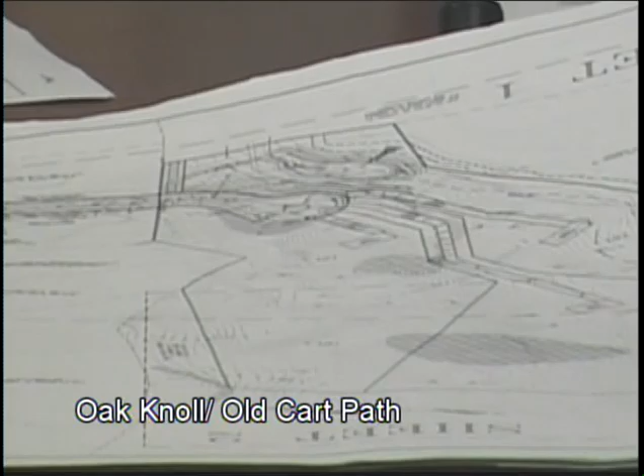For those of us who didn't have the opportunity that John had to go down there and take a look, could you point out some of these features on this cul-de-sac here and show me what's going on?

We have the ledge on both sides of the road here. This is a small piece. This is the large piece, that's the one they're worried about with the fence, and that's going to have a steep slope per plan. Okay, but now that's the one with the 16-foot drop? Yes, straight down. Gotcha. That's the one that has to be adjusted. Understood, okay, thank you.

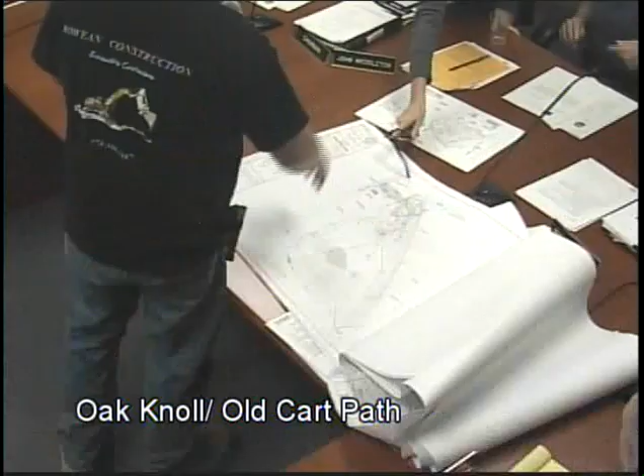And where are the rock piles? They're on the side of the road right here. Over there, okay. And the stumps? They're right here. Okay. The idea was when they clear the trees, we were gonna have trailers come in and take all the stumps and everything out. Yep. It must be there, yeah.

Where does that lady live, right here? I believe right here. Okay, any other gentlemen? There's water on that side. The slopes down here. Yeah, it goes down to the, yeah, okay. All right, so basically, to me, you gotta get that ledge hammered right away. It's gotta be safe.

Does that seem reasonable? Do you think you can do that? As you hammer it, you need to, I mean, there's quite a bit there. The idea was we were gonna bring it right to the lots and put it there, hammer it. Bring it to the pile. They're letting you keep the pile, assuming this is it. Mm-hmm.

And why couldn't you bring it right to the lots? They have to be cleared and prepared for the fill, which is not gonna take very much time once they start. But they're large lots. You could still generally bring the rock in the area of the lot and still get all your clearing done. No, there's not enough room for the lots like that. It has to be cleared, stripped, and then filled. Yeah, they're really odd-shaped lots out there.

So when you say contingent, do you mean he has to do that first before they get released? Yes. But he's saying he wants them released so they can hammer it and bring it to them simultaneously. Again, this has been in process for 3 years. That's why we've been waiting, for the owners to get their lot releases to be able to finish that.

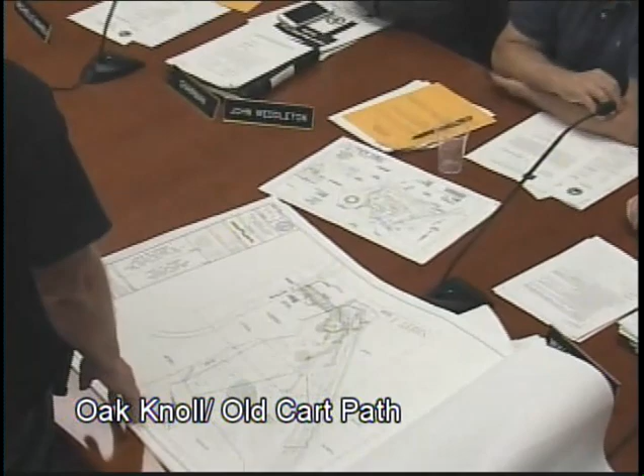The thing is, I don't want to get a call that somebody slipped off there and died. It's dangerous. I guess the commission got a call because 2 young kids were up there a couple of weeks ago, and he's on me to get this done because it's part of the site approval. It's got to be done, as far as I'm concerned. And there was going to be a fence at the top anyway after it's hammered, if I remember correctly? Yeah, I remember that.

So if you don't want to hammer it down, how about you put a fence up, then hammer it? You can't put a fence up and make it safe. No, you cannot. Because I was going to say, bear the cost of 2 fences if you don't want to hammer it down, something to mitigate the safety issue. You can't. It's right on the right of way on Stop Road. You could walk right up either street and climb right up the hill, which is what the kids are doing.

So are you in agreement with the conditions of the board? Yeah, if that's what we have to do, yes. Okay. Can I ask another question? I'm sorry, I don't know if this is the right forum, but the reinforcement of that elevation drop, that's not part of this, that's out of bounds right now?

No, I don't think it's part of this. Is that stabilized? That's my question. It's all rip-rap right now, stabilized. All right, so as long as it's stabilized, it's according to plan and according to the design plan. We just don't want the water running down into the Army Corps land, that's all. Will you be cleaning up the lot area as well? Like there's stumps right there?

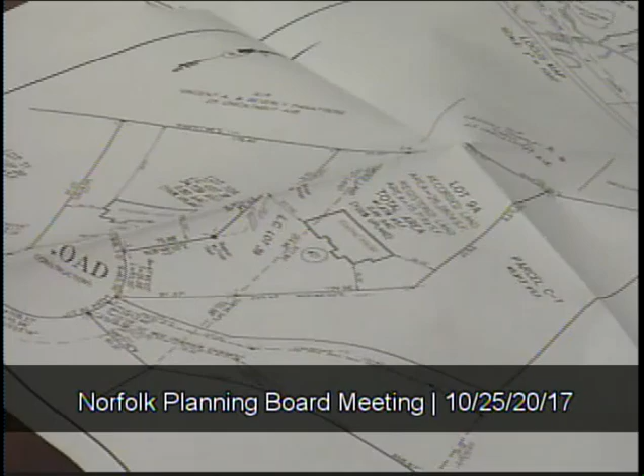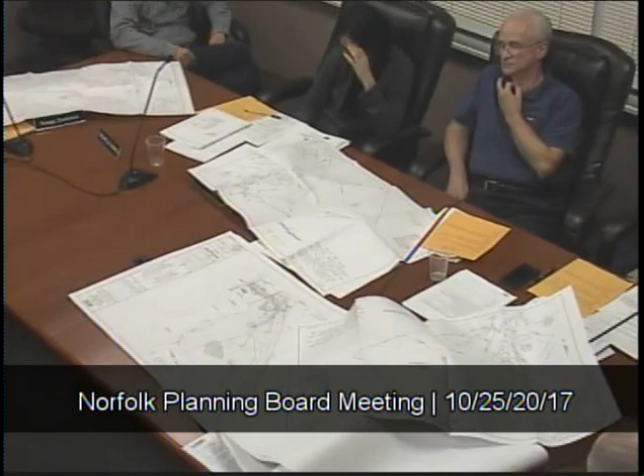And I did ask for a reduction in the amount of money to be paid because I've been maintaining that I've been cutting that detention basin every year, about $800 or $900 a year to cut it. So I've asked for a little bit of reduction in the amount to be paid to the town. So that was my reasoning for the reduced amount. I thought it was a typo. I thought we'd agreed on the full 26,000. I saw 13, and said, wow, it's a typo.

Incidentally, Lou approached Jack, although it's got nothing to do with Jack, it's this board. And I thought the idea overall was reasonable because the open space plan has extra open space by our percentages required. The way his worked out, he gave us more open space. By adopting it and changing the plan with the lesser amount of land, we still are in our regulation requirements for a percentage of open space.

Right. I thought the neighbor was gonna buy that. He would give us the 26,000 for the open space fee and save a lot of confusion going down the road. I thought we're pretty well all set until the typo came and I saw half the money. So I was gonna suggest to Lou that, me personally, I thought it was a good idea for the whole 26,000 with this plan signed after we get the funding for the open space fee. But we can work out the semantics with town counsel, handling each thing simultaneously, but I would need to get the plan signed.

It has to go to land court, then I have to make sure it's clear, but we can't do that without the funds. Well, it would be contingent upon. But if we sign the plan, it goes to land court. You could do all that work first, and then bring it back. The way we've done the others is the planning board signs it, it goes to land court, then it comes back to the planning board. You're gonna have an interim step, because you're gonna adopt the plan of record, change it, and then come back to us so we can vote on it.

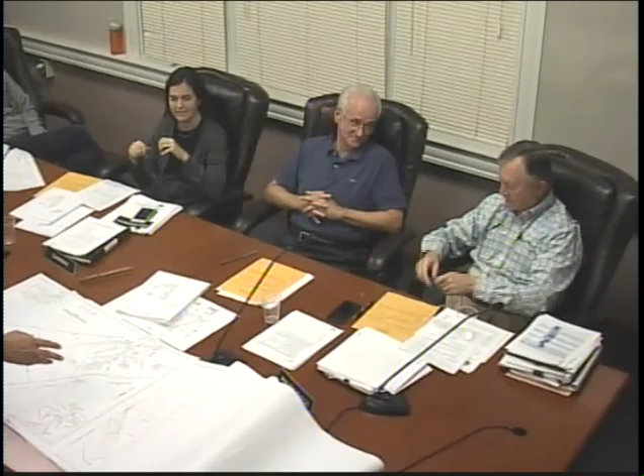If the board were to agree to the modifications, we'd have to agree on the exchange of the money and the timing of that. I'd have to be able to convey to the homeowner. The homeowner would have to give us the money and we record it, and I would have to give a check to you folks that you would hold in escrow or something like that. Before we vote and sign the plan changing it, we would have to have the funds escrowed, because once we sign the plan, everything else is gonna go through.

Maybe I could take up a loan somewhere. Maybe you could go to the bank and just plead. We'll see, hopefully.

If that were the case, then we'll work out the semantics in the conditions, how to get the money to the town and the closing. You could ask the board if they're open to that arrangement. I think it makes a lot of sense, as long as the typo was corrected. I'm a little bit confused why we even need the first modification. Well, because on our document, the open space permit that was recorded, it states the amount of land with a copy of the plan. So we have to actually change our permit, the amount of land that will be open space.

Is that what you're referring to? Yes, right. The amount of money is the same from the original, it's still 13 lots, right? We're not talking about the funding, just the open space special permit plan. I understand the second. He asked for two modifications. I get the second, the open space definitive. I'm in favor of it. I think it makes sense. I don't understand why we need this first modification.

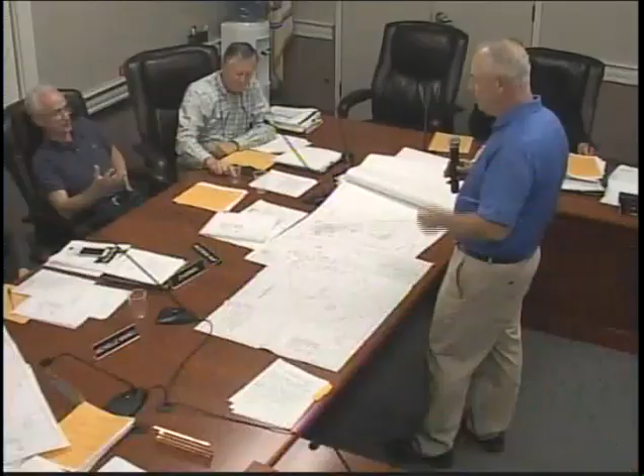I don't think you're understanding. I guess I'm not. Because right now there is no money, because you didn't collect it. You didn't pay it. You can still pay it. There's nothing in our rules and regs that stops you from paying it. Why would I pay it? Because you owe it, it's the law. It was what was determined. So Lou, I think what's gonna happen is, before you start your transacting, you're gonna have to forward the cash yourself, so we can get these things signed, and you can go to the land court and do your thing.

So if I have my attorney send a check to the town to be held in escrow pending the signing of this plan, with the agreement in principle all agreed to and signed off, and we'll leave that to town counsel, that's fine. So you'll have the check, but I get the plan, so it has to be like a trust issue. Exactly. Certified check. So in any case, hopefully that'll work out fine.

I'll be back for bond reduction. I also dropped off the as-built, so if there's any issues. Did Bob get that? He's been keeping me abreast anyway. We're almost there, very close to having everything done. Very good. It's just gonna rain a lot. All right, so we'll proceed on a good faith basis. Absolutely. I think we'd be crazy not to for that type of arrangement. We can actually vote on that arrangement upfront, and then it's not good faith.

It's documented as a vote. Well, that's what I was asking for, if you want to vote to do that. Once we receive that in escrow, that would be a little bit stronger. Make a motion to that effect, to approve this contingent on the funds being paid.